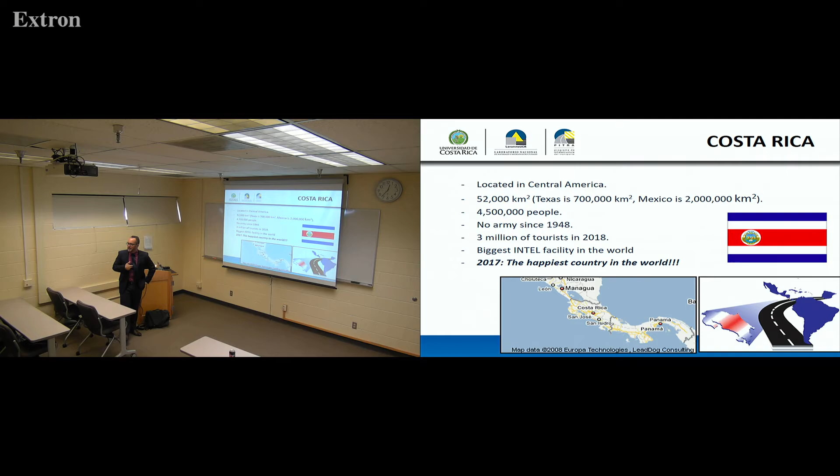And for the second time, in 2017, we are the happiest country in the world. This is very important.

The University of Costa Rica has 240 academic options, so bachelor's, licentiate, master's programs. We have 480 grad programs at the university. We have 257 international agreements.

Actually, we are working on one of them with Dr. Erol Tutumluer. There's a little bit more than that, but like 40,000 undergrad students and 3,000 grad students. And we are number 3 among universities between Mexico and Panama and the Caribbean area.

The first one is UNAM in Mexico City. The second one is the Technical Institute of Monterrey. And the third one is the University of Costa Rica.

In Latin America, we range between 16th and 21st, depending on the type of ranking. And we are among the best 500 universities in the world, depending on the ranking, but I think it's pretty good for the university.

My program, the program that I am leading, belongs to what we call LANAMME-UCR. LANAMME is the National Laboratory of Materials and Structural Models.

I have to say that one of the developers of the lab was a University of Illinois graduate, Dr. Guillermo Santana. Actually, right now he's in the Board of Regents of the university. He made his PhD in the 70s and 80s.

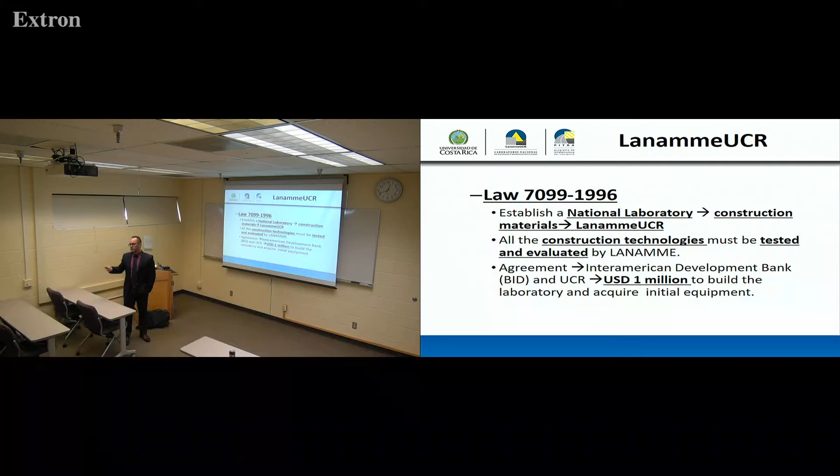But for a lot of years, we've been the most profitable investment of this bank, because with this seed of $1 million, we have done a lot more things, which I'm going to show you. In 1997, when I started as a research assistant, this is what we had: basically the Marshall hammer, a couple of viscometers, and one penetrometer. At the beginning, our lab was thought of more as a structural lab.

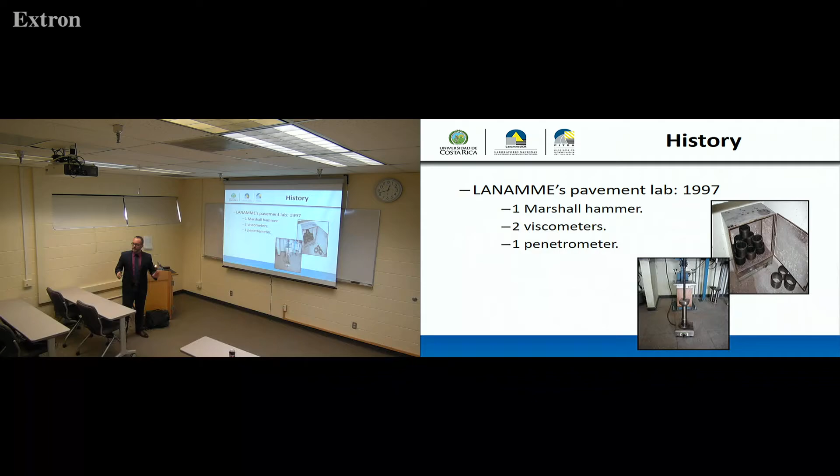But suddenly, the humble pavement guys start working, and we developed what I'm going to show you. But at the beginning, the idea was structure, not pavements.

So this is what we had in pavements, and we started working from that at that time. It happened in 1997. Our national road network was in pretty bad condition, so we started helping and receiving money from the government to improve the conditions. Right now, in the national road network, you don't see this type of distresses.

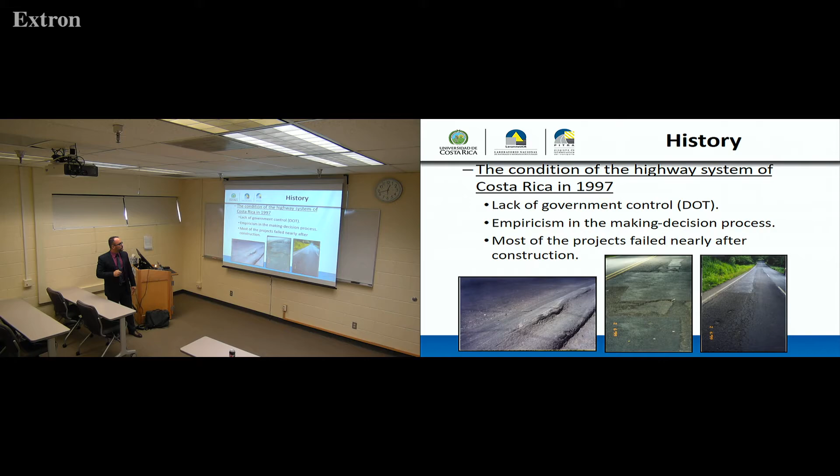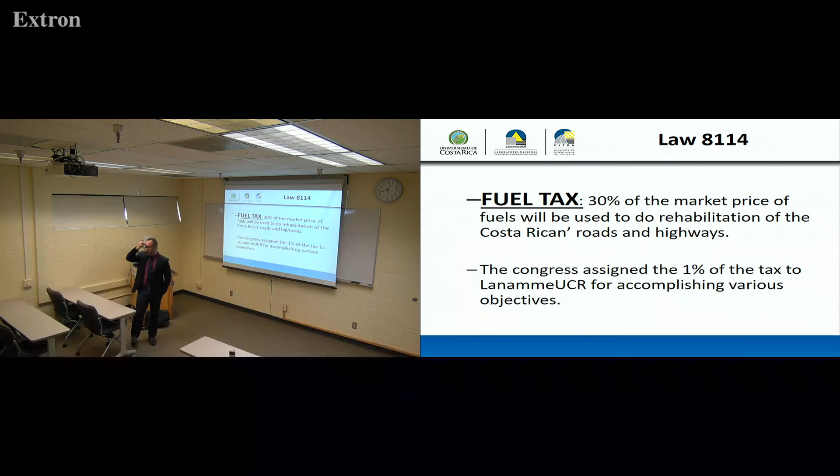In 2002, this new law, the 8114, started giving us money. So we receive 1% of the fuel tax. The fuel tax in Costa Rica is 30% of the fuel cost. It varies from year to year, but it's between 8 to 9 million dollars a year for doing various things that I'm going to show you.

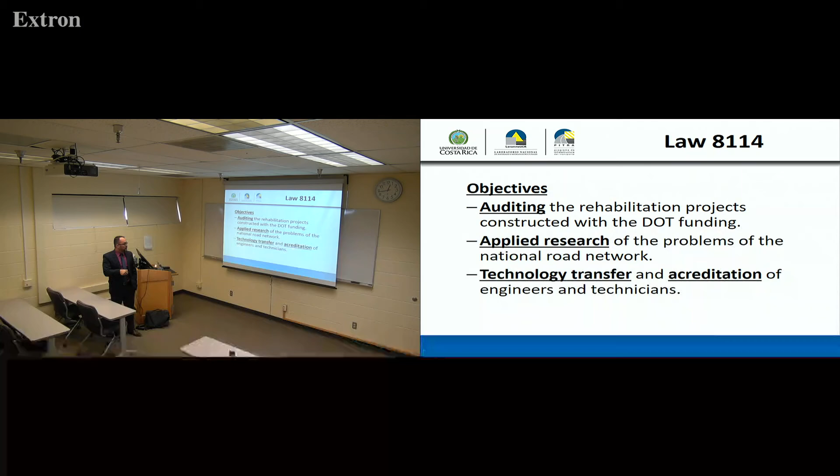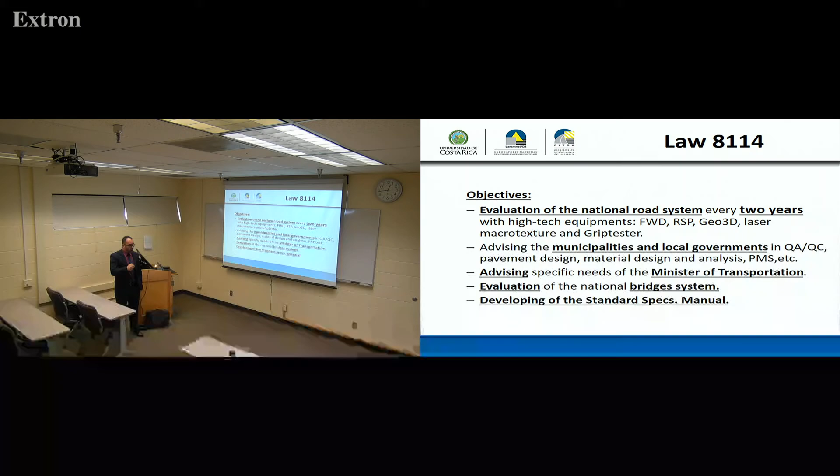Right now we have 6 PhDs working with us, 3 PhD students, and 20 masters from several universities around the world. Not only from Costa Rica - some of us started going to study abroad like 20 years ago, 10 years ago, and all those people have returned to the lab to work.

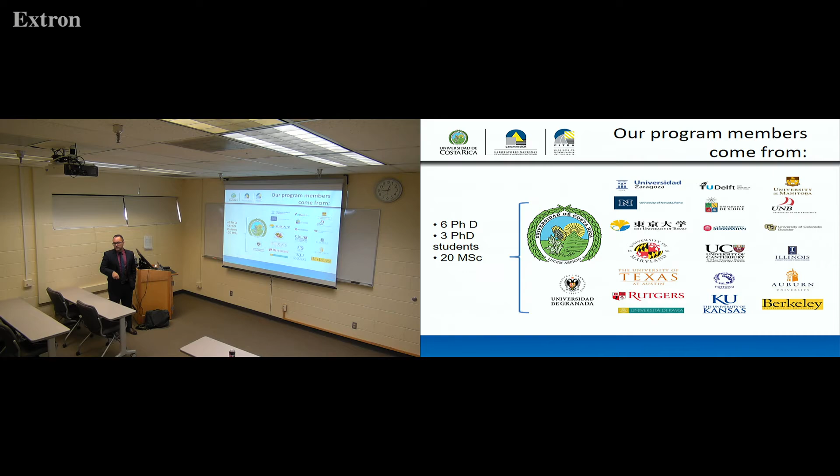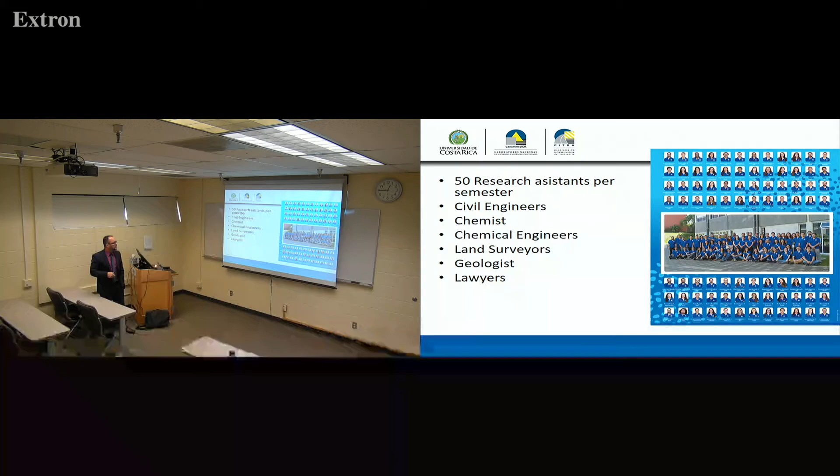Right now we have, as I mentioned, like 50 research assistants per semester. We take a picture every year. In the group, most of us are civil engineers, but we have chemists and chemical engineers that gave us all this knowledge to understand some things that we don't have the background for. We have land surveyors, we have also a PhD in geology, we have geographers, and unfortunately, we also have a couple of lawyers working with us.

I didn't put them up, but right now we have like 15 former students doing masters and PhDs all over the world - Europe, a couple in Brazil, and like 8 of them in the United States.

So we are working in-house, so in the lab, we can see the various phases of the materials, and it was planned like that. This is an actual picture of our AFM microscope, atomic force microscope we have. Actually, this image is the first image that we took of an asphalt at a size of 20 by 20 microns. So this is when we start trying to understand what's happening at this nanoscale.

We can do all the micro testing that you know, rheology and all this type of tests. We have all the performance normal tests, the performance for HMA or concrete or granular bases, all those things, and full scale testing. The idea is a little bit philosophical, but we are trying to relate everything.

We are seeing the properties at this scale. Right now we haven't linked everything, but we have the data - for example, of the asphalt here, and we have what happened to this same asphalt at the full scale test. So we are trying to link everything, what is happening, how the properties are changing, how the nanoscale properties relate to the full scale properties. We are doing some research about that.

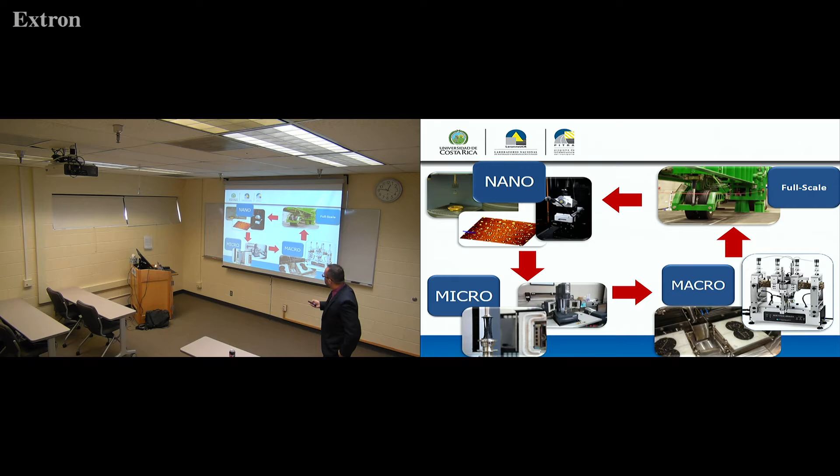For example, with Dr. Kim, not the old one, the young one, we are trying to develop some analysis here with FAM, and we are trying to see how we relate the FAM with the full scale test. We are doing several things, we are now playing with the data. We are working on all those things right now: nanoscale, moisture damage, HMA testing, PCC, recycling materials, a lot of recycled materials, stabilized materials, oxidation, full scale testing, LCA, pavement design, and software development.

This is an image of a crack in asphalt. You see here, this is 15 microns. And we developed this - this is covered by gold. There is a special process to cover the sample with gold during a night, and you can really see what is the size of the crack and what is happening around with the morphology of the sample.

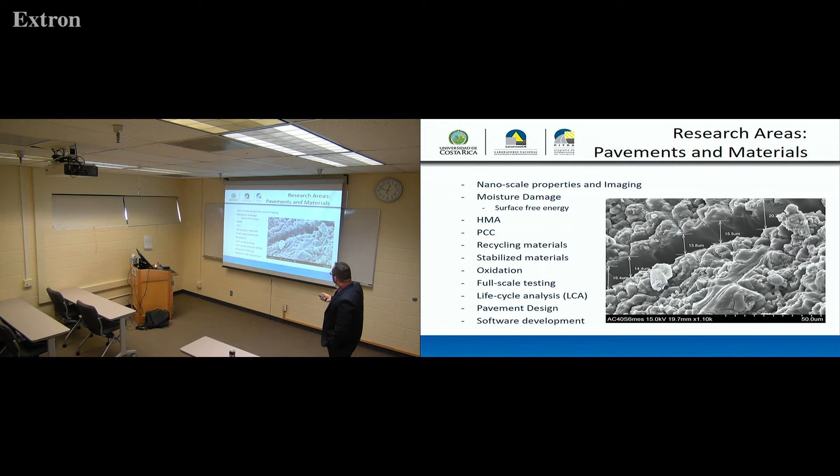I'm not an expert in that, but we have people that know, the chemists know a lot about that. This is the oxidation analysis and research we are doing, starting from the binder and all the crystalline phase, the peri phase, the sal phase, and how this morphology is changing after environmental aging.

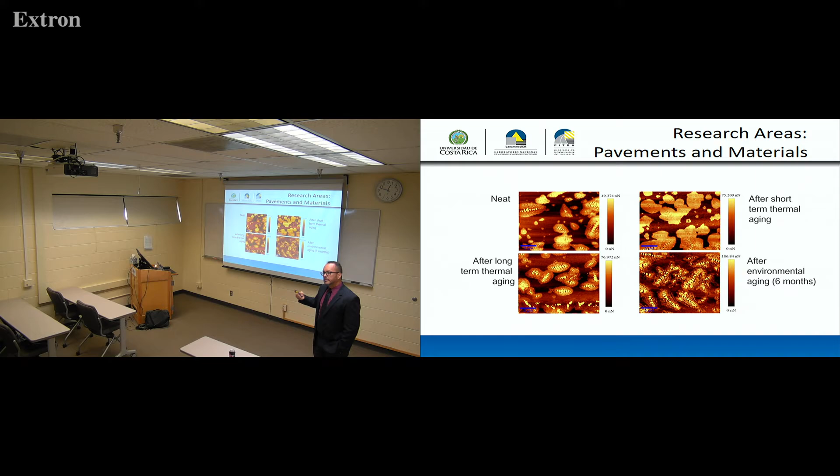This is, for example, 6 months of aging under environmental conditions, exposed to the air and to our rain. So we are doing some oxidation testing in a special machine we have, a little bit similar to the one you have here. And we also have a lot of samples on the roof of our building, aged with time, to see what is happening.

And we are also working with surface energy measurements. Let me talk right now about what we are supposed to talk about: accelerated pavement testing. This is the device that we have.

We have the Dynatest Mark 6 heavy vehicle simulator. We bought it in 2012, after 3 years of thinking about what to do, because we needed to sit down and think about what was the best machine to suit our needs, and also the type of experiments that we were going to do.

We received a lot of help from the South African guys, Louw du Plessis, Morris De Beer, Nick Kotsia, to shape the experiment. I think we've been very successful, and Dr. Al-Qadi knows that right now at the APT committee of the TRB, we are playing a good role for a new program, because we've only been doing this for 6 years.

But I have to say, we received a lot of help at the beginning from people that have done these tests for 40 years, just to know exactly what to do. Also Wynand Steyn, I know Wynand, they helped us a lot. They went to Costa Rica 3 times to teach us how to do this test.

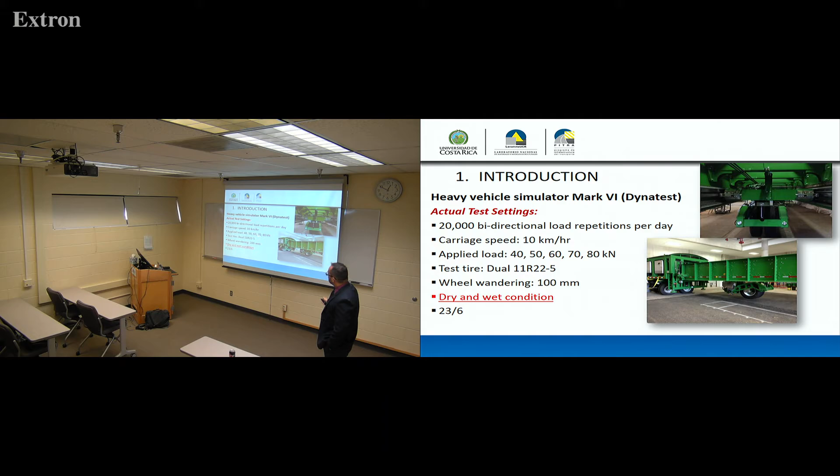We are passing 20,000 bidirectional load repetitions per day. We are working at 10 kilometers per hour. We are applying 5 different loads on each one of the test tracks. This is the type of tire. We are applying wheel wandering. We can apply dry and wet conditions, and basically we are working like 6 days a week.

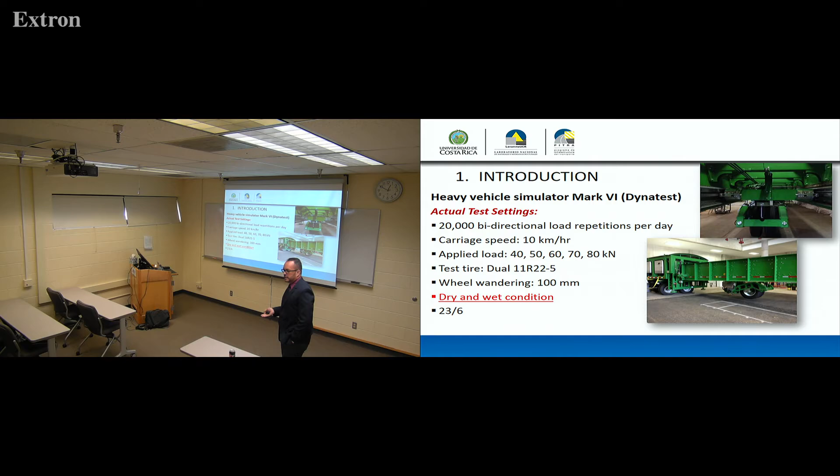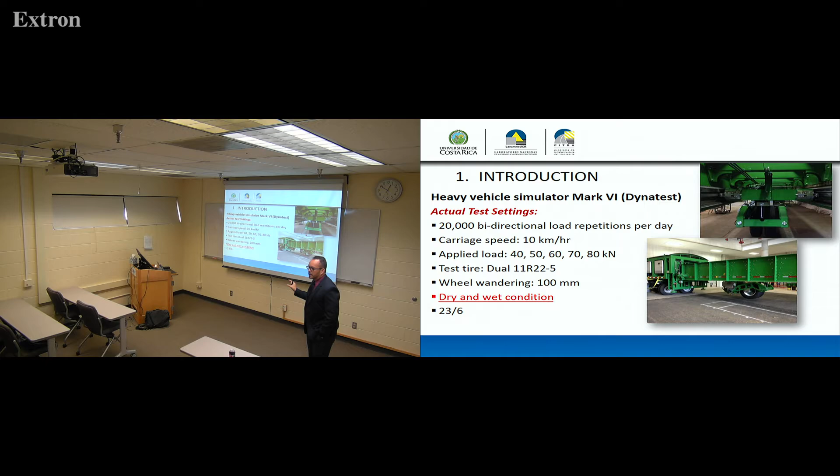We just stop the machine on Friday to do some preventive maintenance, once a month to do some stronger maintenance. Every 3 months we stop for like 3 days to do an overall maintenance. Basically the machine is working 24 hours a day. It's very important in order to have a cost-effective experiment.

We are working with moisture. Moisture is very important for us. This is the reason we developed a full facility in order to simulate the groundwater table and also rain. And this is the reason, you know. Let me show you that.

Where we have the least rain, it's 1,200 millimeters a year. But the average of the country is almost 5,000 millimeters a year. But we have places with 8,000 millimeters of rain a year. That is a lot, 8 meters of rain. So we need to simulate this pretty well.

When we were starting the dynamic testing on saturation levels for granular bases and soils, we started doing all the curves from dry to wet, but then we met with the geotechnical professors, and they told us, Luis, we always have 80% saturation for the whole year. This is mostly true even in the drier part of the country, where we have the soils and granular bases, basically the subgrade, fully saturated or very saturated.

So these are things we need to consider in our design, because basically what Latin America has done is copy others' design methods without calibration. And this is when we start having very bad pavement performance.

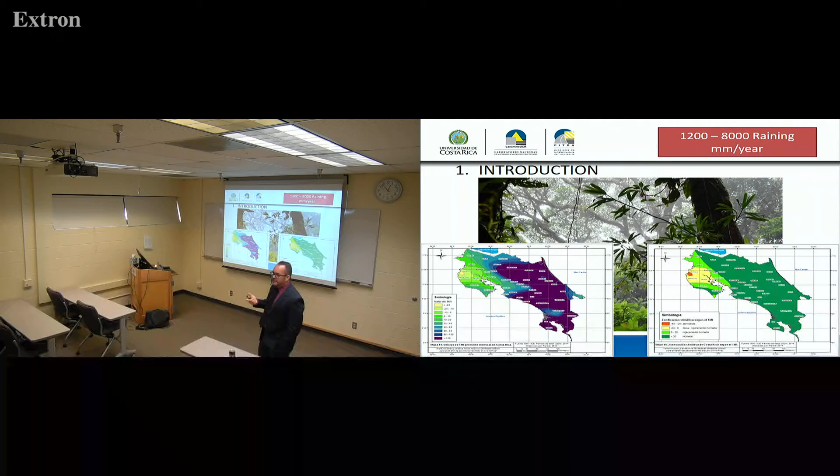So we have these rainforest conditions, but if you go to Peru or Bolivia, you also have the ultraviolet rays of the sun hitting in a very different way than other parts of the world. There is not a lot of research about that. You can see in Bolivia or Peru, a hot mix asphalt pavement failing very quickly, only because of this oxidation. So we need to develop research specialized for those conditions as well.

The numbers: we have passed with this experiment 9 million load repetitions, around 75 million ESALs, and 16 test sections. I'm going to show you that.

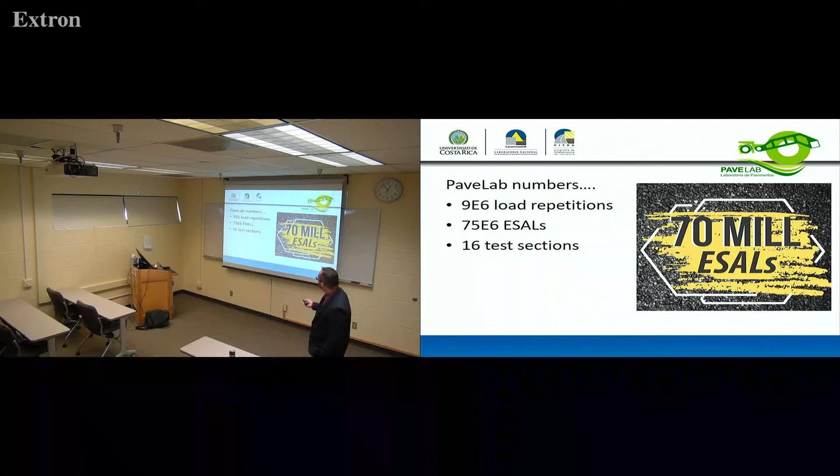We could put the best pavement here and have minimum repetitions and nothing happens, so it's not going to give us information. So we designed something typical for Costa Rica, but constructed so that we were going to be able to fail it under test, because we want data to see what is happening, how the moduli change.

We also evaluated construction practices, yes we did it. It was pretty funny - the last 2 sections, when we had the truck dumping the HMA, we had to use shovels to move it because it was basically cold. But it's pretty common in Costa Rica, so we were not afraid about that. And we calibrated our own CR-ME, the Costa Rican Mechanistic-Empirical Pavement Design Guide, that is almost ready. The calibration matters because the software is basically already developed.

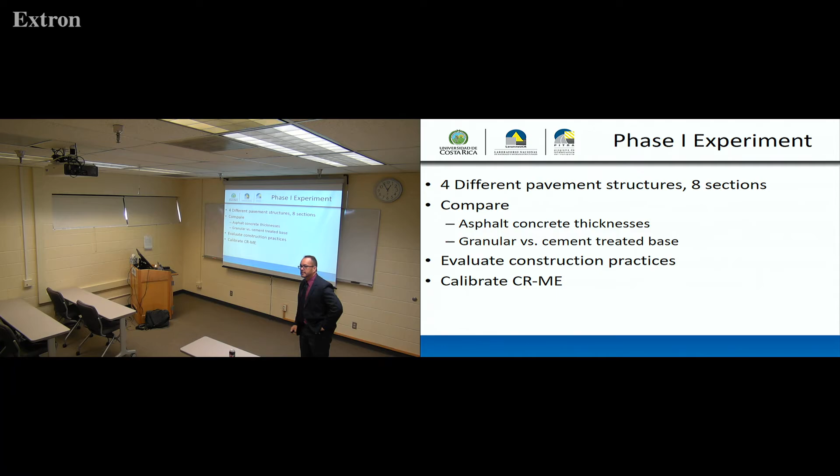This is the plan. We did this model 2 years before we received the machine. So basically, we planned and designed this test pit. This is like a swimming pool. We have filters here, and we put the subgrade.

The geotechnical guys didn't like this because we had to touch the subgrade, but we don't have another option. Because if we use the natural subgrade as it is, you have the groundwater table moving all the time, because in Costa Rica you have a lot of rain, so you have infiltration no matter what. So we need to have a very sealed test pit in order to avoid infiltration from the water outside.

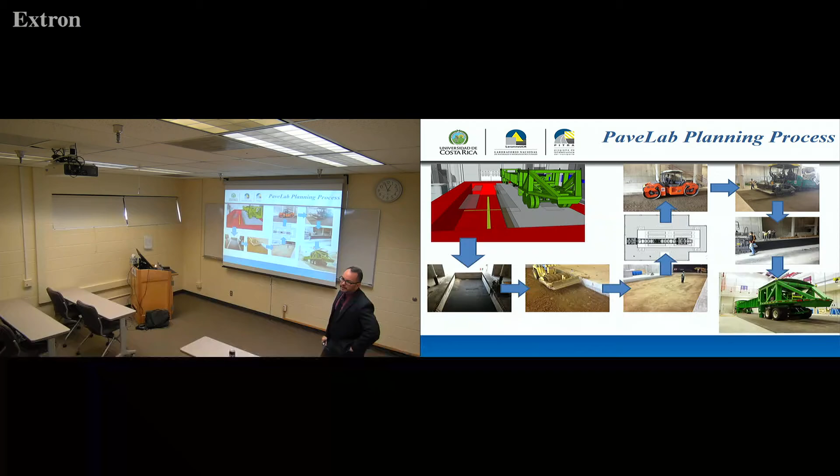And as well, these are the drawings. We have actual construction machines, the regular ones, so we were sure that this is exactly how the roads appear in the field. And finally, we had everything ready to perform the test. This part of the building, this is the new building that we built, was designed only for this experiment.

Click on the figure. This is the HVS working.

How long are your test sections? It depends, at least 3 months. One of them took at least 6 months. But we are learning - the idea is not having so much time.

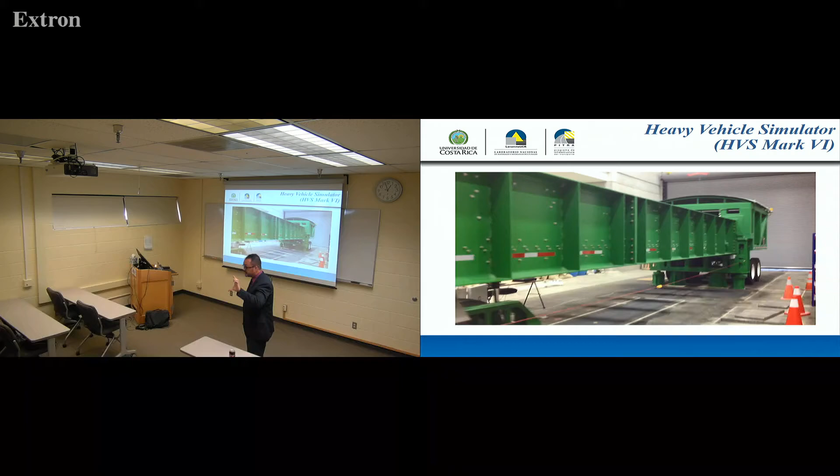But the cement-treated base with the 12 centimeters, basically nothing happened to it. You see the HMA - I'm going to show you something. The moduli of the HMA didn't change after 20 million ESALs.

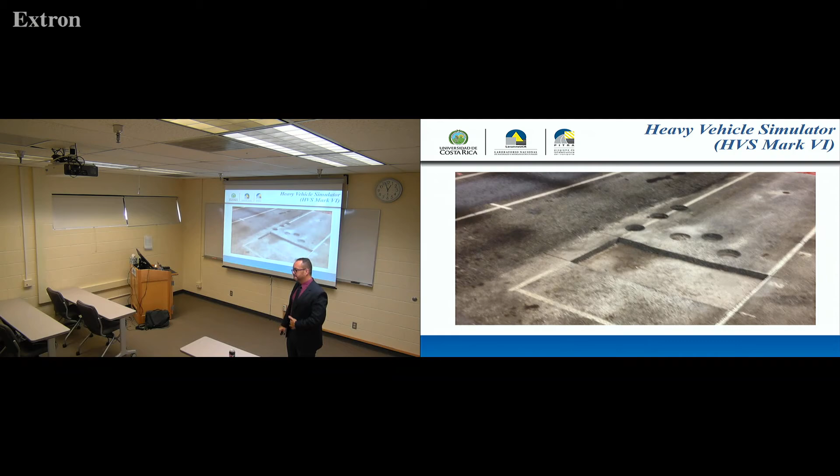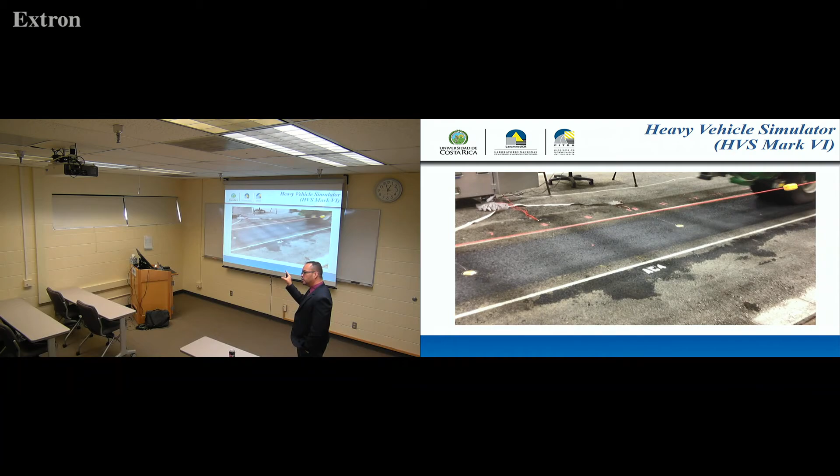Is that 8 meters long? The length - the full length is like 8 meters, but the real test length is 6 meters, plus 1.2 meters wide. This is the dead man cable - if something happens, you just go up, push it, and everything stops.

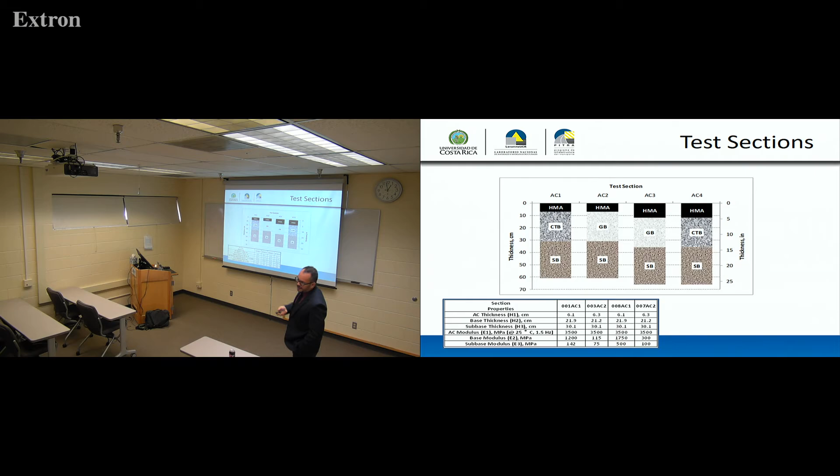Okay, well these are the sections. As I mentioned, the sub base is the same size, it's like 30 centimeters. We have cement-treated base and granular base, thin and thick - well, thick for our condition, because I know that in the United States thick HMA is thicker than that.

Okay, so those are the sections. We have 2 sections, we can perform two tests per pavement. Those 2 are 12 centimeters on top of cement treated - sorry, this one is 7 centimeters. This is cement treated base, this is granular base, and this is the saturation chamber, where we can change the groundwater level.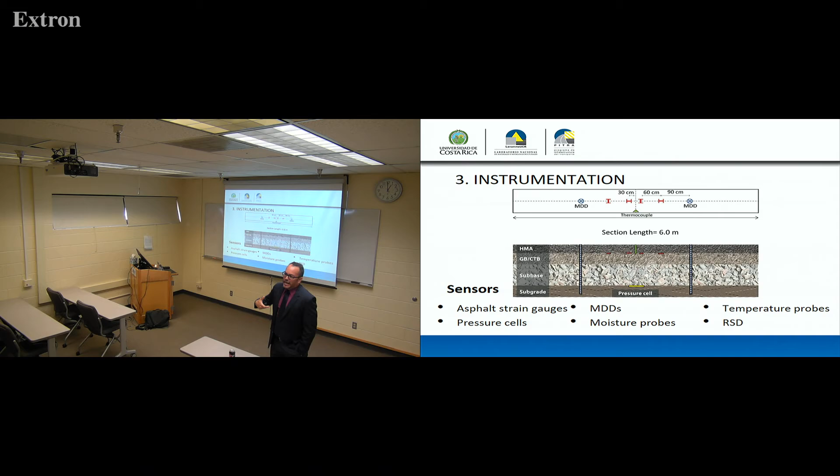the MDDs. We also every day perform the RSD measurement, the road surface deflectometer. So basically we can have 3 measurements for deflection: the falling weight at the beginning and at the end, every day the RSD, and every day also the MDDs. If you tell me, look, what have you done with this data? Not much yet. I'm going to show you some, but there are a lot of things that we haven't studied yet, because it's a lot of data, millions and millions of data.

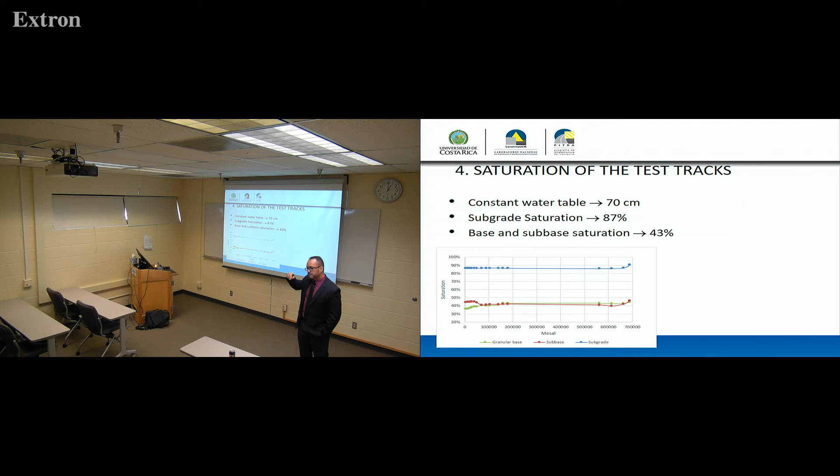Let me see, just to show you this, the saturation. In general, when we apply saturation, we have 70 centimeters of constant water table. The subgrade saturation is around 87%, which is normal, and for suction, the base and the subbase reach a constant value of 43%. You can see here how we monitor the saturation through the millions of ESALs applied in the test. So basically, it's pretty steady through this time. If we didn't design the test pit like that, we were going to have a lot of fluctuation on that.

Okay, so 5-year summary. We have performed the 8 sections that I already showed you, wet and dry conditions. 2 sections related to maintenance techniques, cold mix patching and surface treatments. We have performed 2 tests related to road safety, retroreflectivity of painting, I'll show you just some pictures, and performance of raised pavement markers. This experiment was paid by 3M and all those painting companies, and a test with interlocking blocks or pavers. Actually this last experiment was paid by a private company.

I was telling Jeff about that. It was a fun experiment. I say fun because, as I told Jeff, Costa Rica built in the Caribbean Sea an artificial island for a port, and they are using interlocking blocks. But the concessionary company is from the Netherlands. So the consultant company said, you have to use Netherlands sand. And it was very expensive; you have to ship it with ships and everything. So the guys that won the bid said, okay, we are going to try in this lab the Netherlands sand against 2 Costa Rican sands.

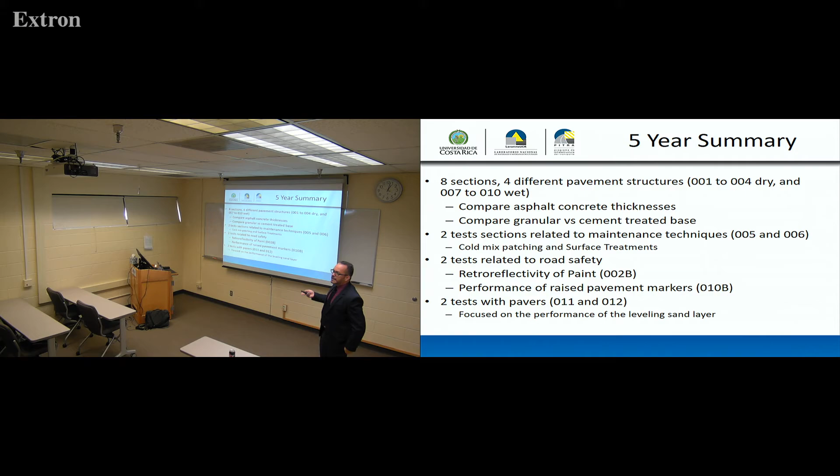So this is a quick summary. I'm not going to go in detail. As I mentioned before, we have almost 10.5 loading cycles, and regarding ESALs, almost 76 million ESALs in the various test sections and the various experiments that we have performed. We wanted to have it working almost every day. As the head of the program, I like to see the machine working almost every day, because otherwise it's not cost effective. We wanted to do a lot of work.

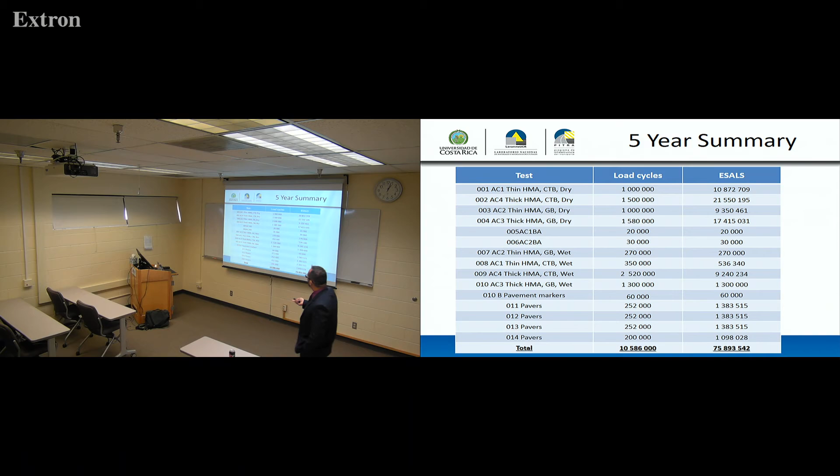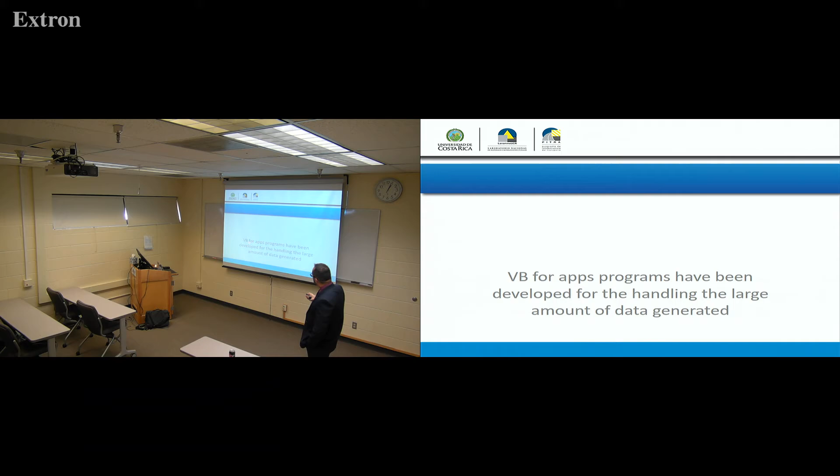We are doing a lot of Visual Basic programming to collect all this data, because it's a lot. All of you that have worked with ATLAS know that having good databases is very important for accelerated pavement testing. Otherwise, if somebody takes the data 10 years after and the database is not well designed, you are not going to dig out any good information. So you need to be very clear about that, and we are working a lot on that.

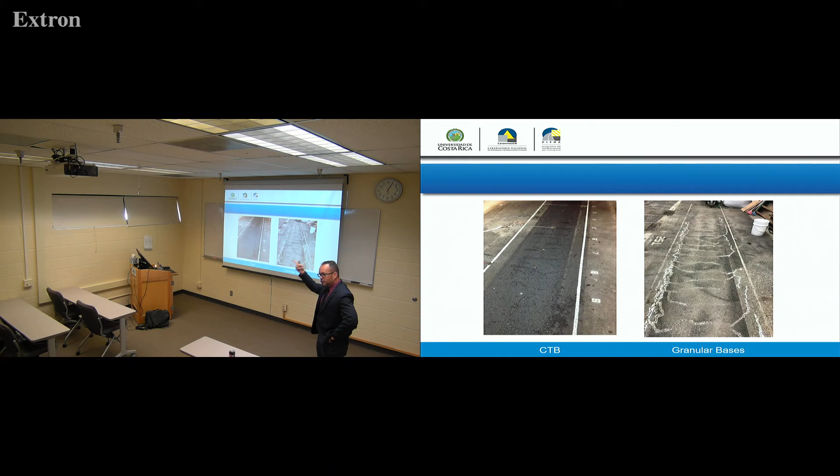But this is interesting. I have this picture here because I want to show you something later. For example, some data: the initial falling weight data. What happened to each one of the sections? This is the highest deflection. This corresponds to the weakest section, the 7 centimeter HMA on top of the granular base. And of course, this one is the stronger one, with 12 centimeters HMA on top of the cemented base.

And we can do several things. This is the initial back calculation of the moduli using the falling weight. The FAA, they have a machine a little bigger than ours, but they have a lot of money. So we can use the falling weight at the beginning of the experiment because we cannot put it below. But the FAA, their HVS can raise up every day, so they move it up and they put the falling weight below.

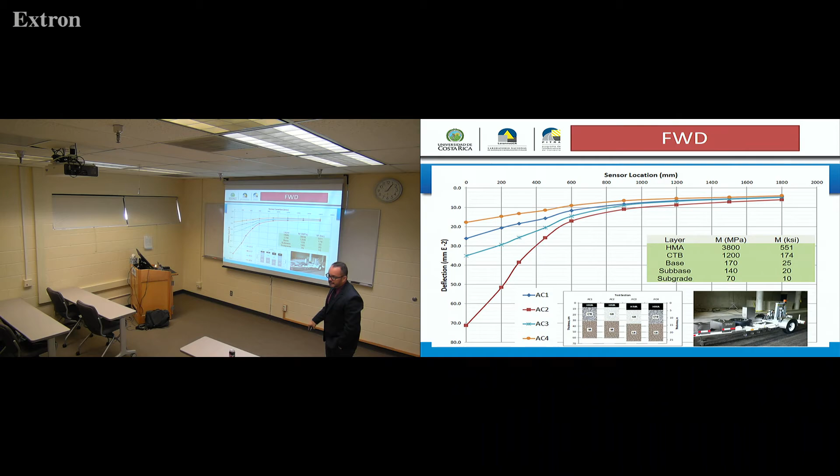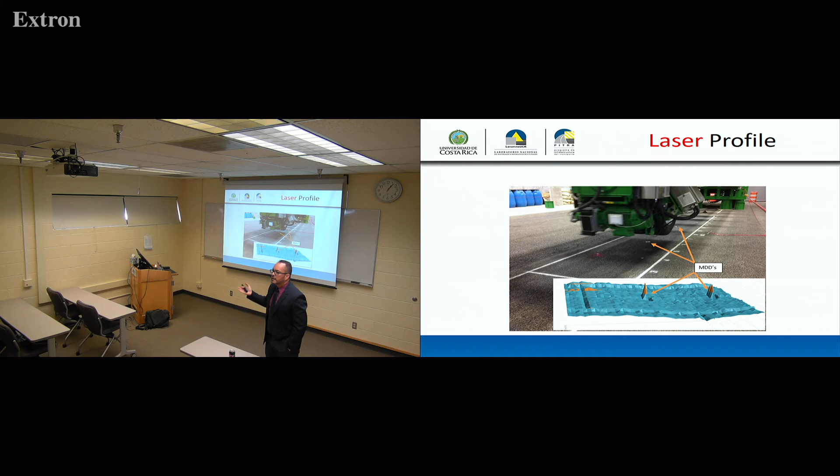It's pretty fun. This is the reason we have the RSD, the road surface deflectometer, to perform everyday deflection basin analysis and compare it to the MDDs, which in fact give us exactly the deflection at each layer. We have lasers here to measure the rutting and to measure the IRI. You can say this is not really IRI, because the section is pretty small, but we are calculating the IRI using the quarter-car model.

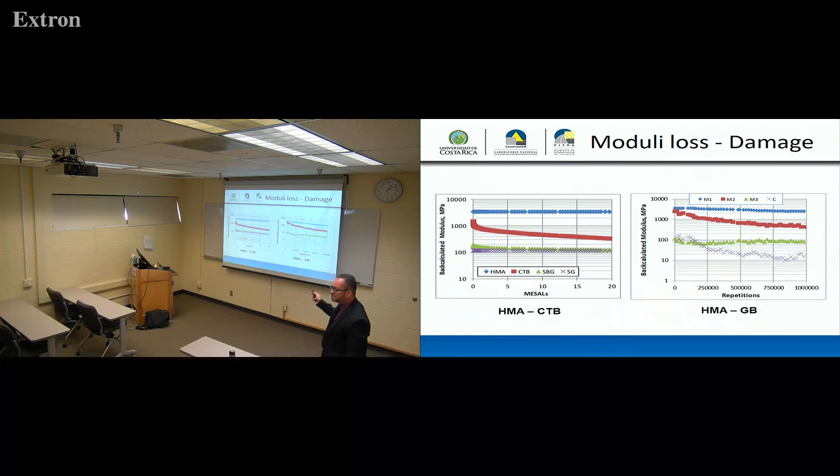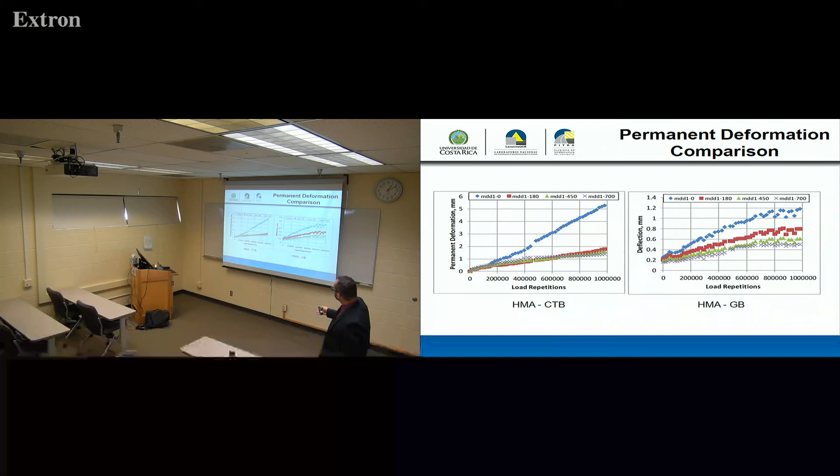And in this case, this is the HMA on granular base. Basically, all of them start having permanent deformation as well. In this case, this is the 12 centimeters HMA. Also, this is the 12 centimeters HMA. What happened regarding the permanent deformation? Again, this is the full set of experiments with the dry conditions and the wet conditions. I'm not going into details of each one.

For example, you can see here, this is the dry condition and CTB, the green one. Actually, this experiment we had to stop, because we had, I don't remember, like 2 millimeters of permanent deformation. So at close to 20 million ESALs, we stopped the experiment.

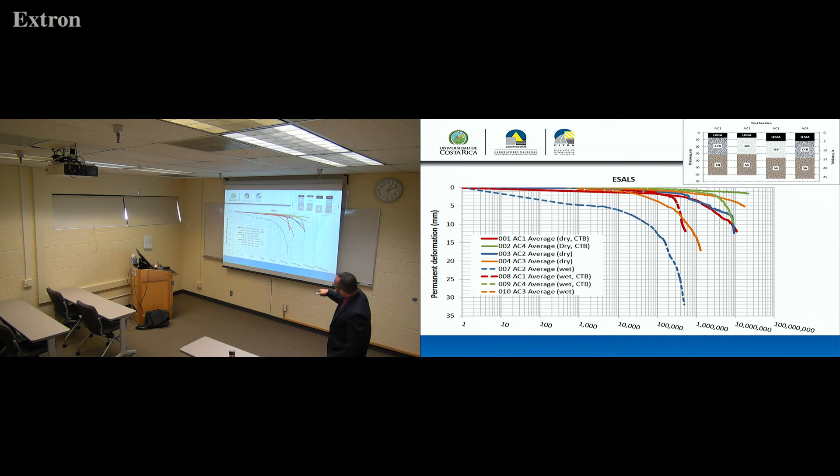Now let's see the other extreme, this one. This is the granular material with the 7 centimeter HMA under wet conditions. So we have a lot of data to see the performance of various sections. At the end, I'm going to show you how we're using this to calibrate our ME.

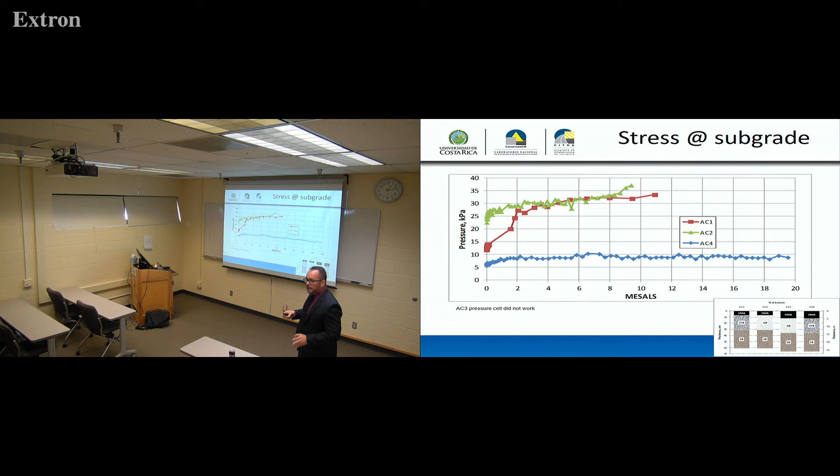Okay. Actually, I have to say something about cracking. In the granular base, you see a lot after some moment. But to see it, we need to paint with water a little bit, to see the cracks, because otherwise, with the cement treated base, you don't see anything. Now we are trying cameras, like infrared, to see if we see something for the cement treated bases.

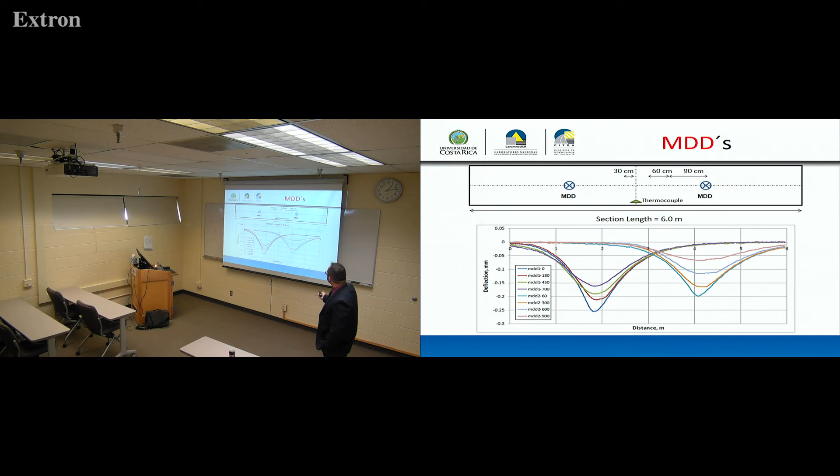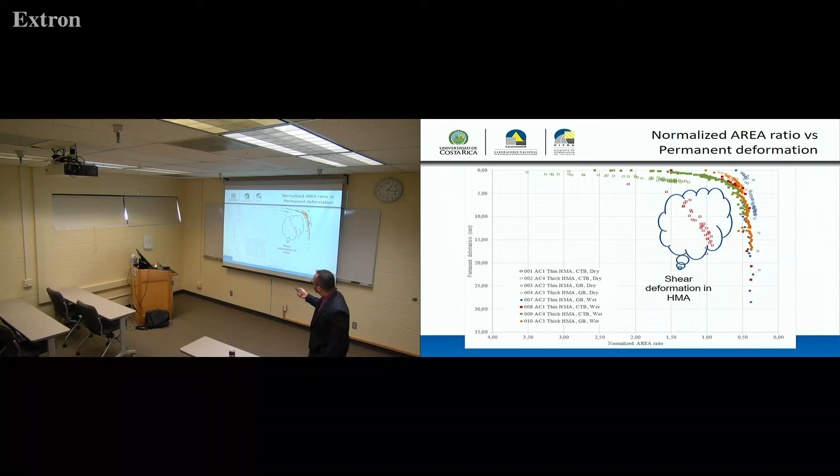And here we have the other various behaviors. For the normalized area ratio, if you are going into this direction, the performance is the worst. So we are trying—do you remember these parameters? I think they were developed in South Africa. We are trying to develop, to validate the specs that they have, or to do some specs for us. Here we have the other parameter, the radius of curvature, and you can see some trends, various trends.

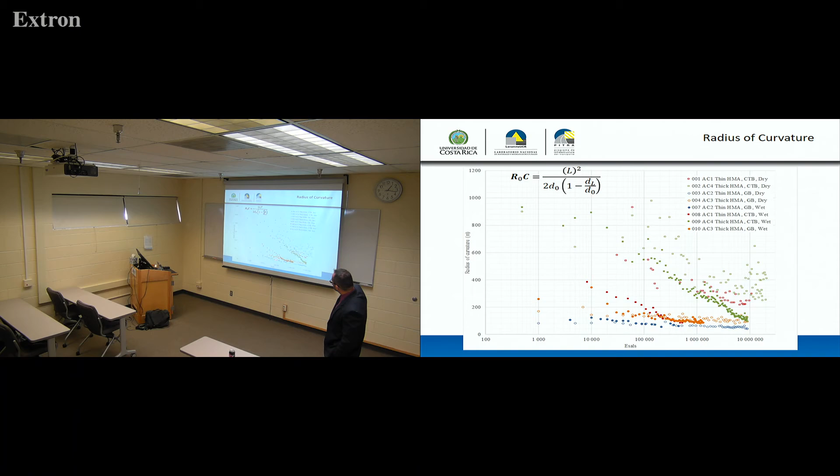For example, here the bigger is the best. At the beginning, I'll talk about this—this blue one is the thin HMA on top of the granular base under wet conditions, and how it decreased the modeling with time. And this is the same but under dry conditions. So we are analyzing all of them.

This one is pretty interesting. This is the normalized area ratio versus the normal parameter that we use with falling weight data. You can have here two different behaviors—this one here are the dry, and those are all the wet results. So we found like sort of a trend, and the data go together, you know.

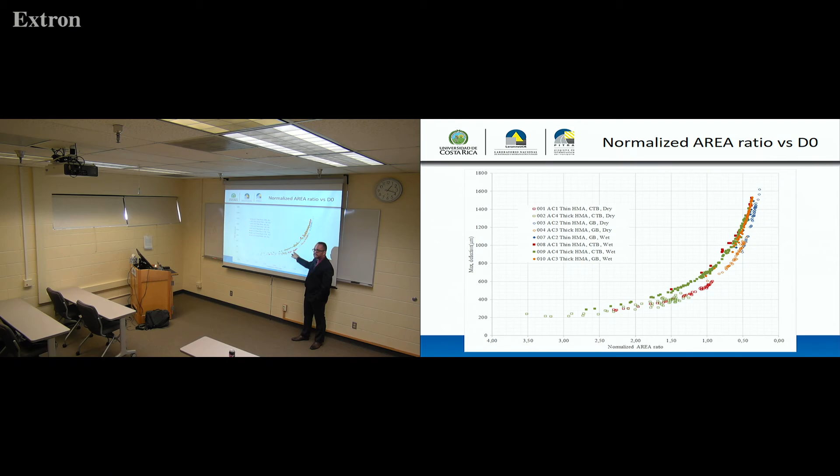As I mentioned, those are the wet conditions, those are the dry conditions, and what is funny is that everything is like continuing. We are not sure about that, but we think that we might extrapolate things about this behavior. If you ask me exactly what right now, we don't know yet—we are thinking. But at least it's interesting we have this difference. It was funny to find this difference among wet and dry, and how you have a section here, and the other is like in the same pattern. So it was interesting.

The IRI—those peaks are the wet conditions, the other behavior are the dry conditions. As I mentioned again, because some people have argued about this before, this is not exactly the IRI we mentioned, since the section is only 6 meters, but we use the same quarter car model to calculate it. So you can see, for example, this section—this is again the thin HMA on top of the granular base under wet conditions—it is behaving well, and there is a moment when it starts picking up.

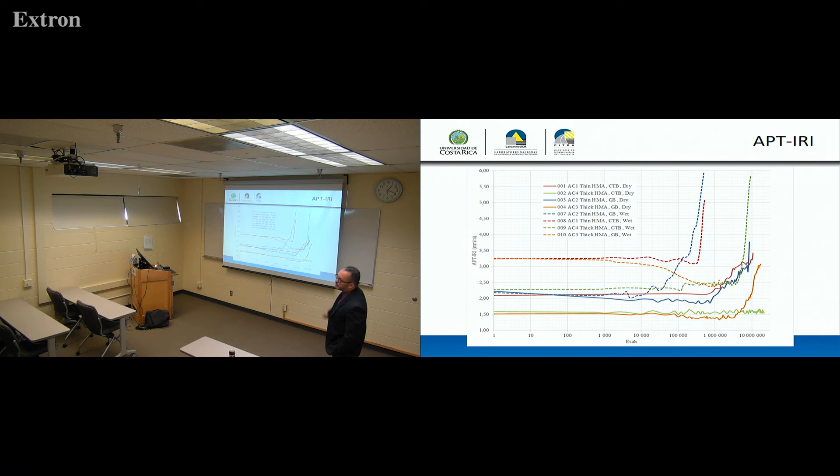Part of what we are doing with this data is to calibrate some performance models, going from the lab to the field or to the accelerated pavement testing. So, for example, we are calibrating this transfer function for the 4-point bending beam—all of you know that—for plant mix and for lab produced mix. We have several data to do that, and we are trying to correlate this with our actual test sections' fatigue mode.

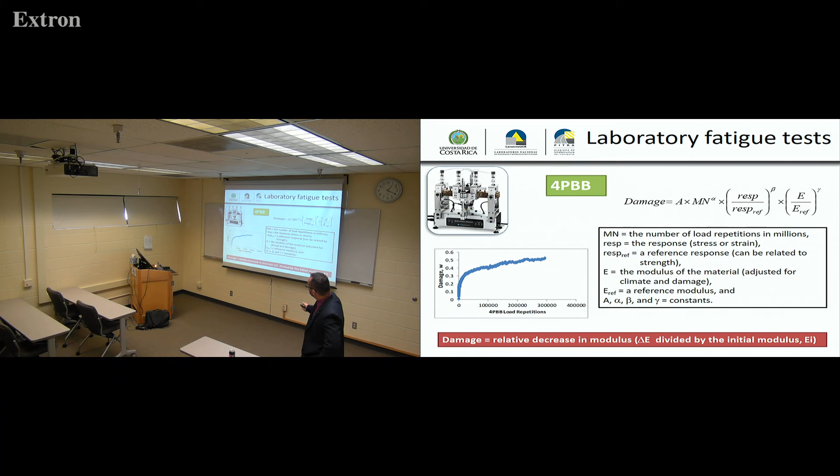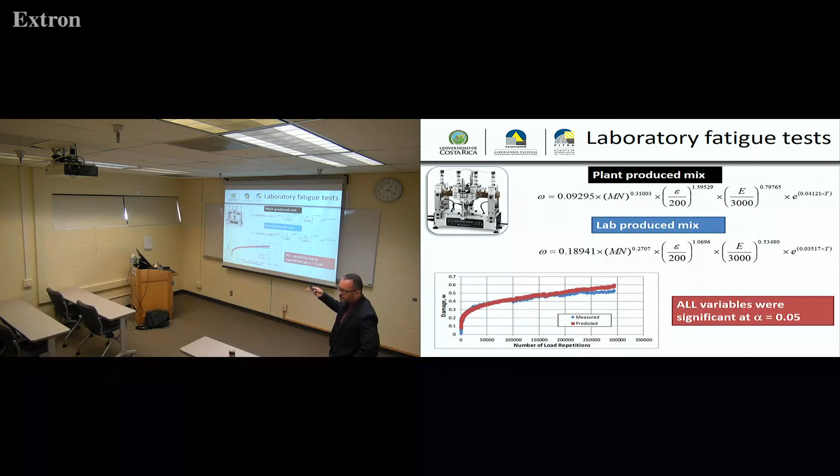We are using the concept of damage, basically how the response is reduced with time, using this damage idea regarding the load repetition in the 4-point bending beam, and trying to relate the same concept to what happened in the field measurements, since we have the moduli every day. So at the end, for both the plant produced mix and the lab produced mix, we have a model of damage. We'll do some statistics to see whether everything was significant or not. We use the data that I already showed you before.

We tried to—it was a very small work, not published—we tried to see if the moduli that we calculated was correct or not by trying to approach it using the 3D-Move software, the viscoelastic software that can predict the behavior of the material under certain speeds. We tried to correlate what we predict with the model against the actual measurements of the LVDTs.

We also use finite element models using this as a tire footprint that we develop in our lab as well. So at the end, we find some correction factors for the plant produced and for the lab produced mix. I'm going to show you one of the equations here.

At the end, for example, for lab produced mix, we found this general fatigue transfer function using this idea that I already showed you. At the beginning, we were a little bit scared that it was going to give crazy results, but we compared it against the MEPDG. It works fine—not the same value, not close, but fine. We also compared it to other fatigue models that we think are closer to our conditions, and it's not giving crazy results. It's giving good results.

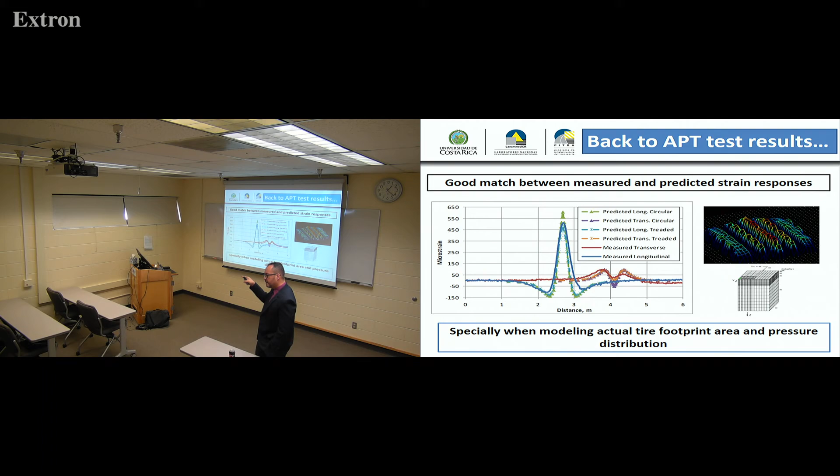As I mentioned, we use several things. This is the only use we have done with the strain measurements. We haven't done much yet with this, but at least we know the back calculation model is a good approach, because we calibrated the transverse and longitudinal strains and compared them against the back calculation model. We performed the analysis, and the results became pretty good.

So we are calibrating this. As I mentioned, the idea is to calibrate our own CR-ME.

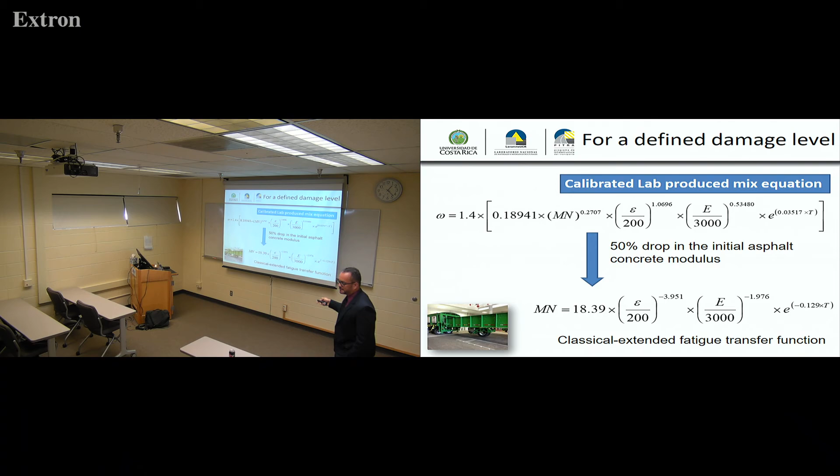We also calibrate some permanent deformation models for the base and the subgrade. Those are for dry conditions. We also have others for wet conditions. So we have the number of repetitions, the deviator stress, the confining stress, and this is the optimal percent of water of the sample.

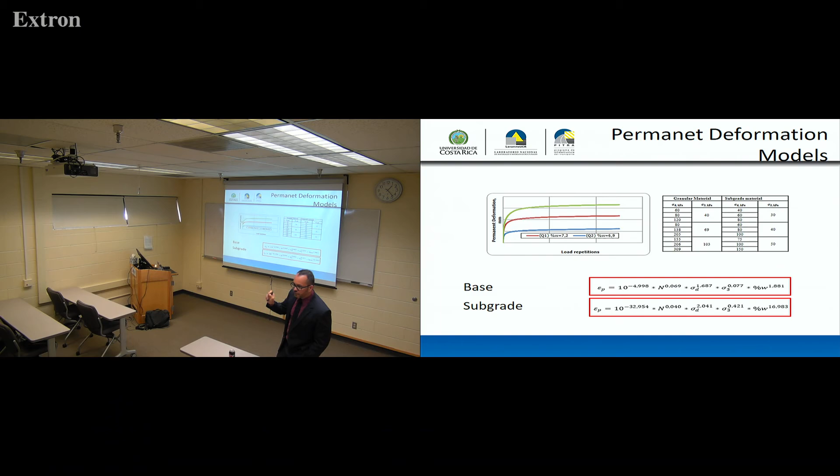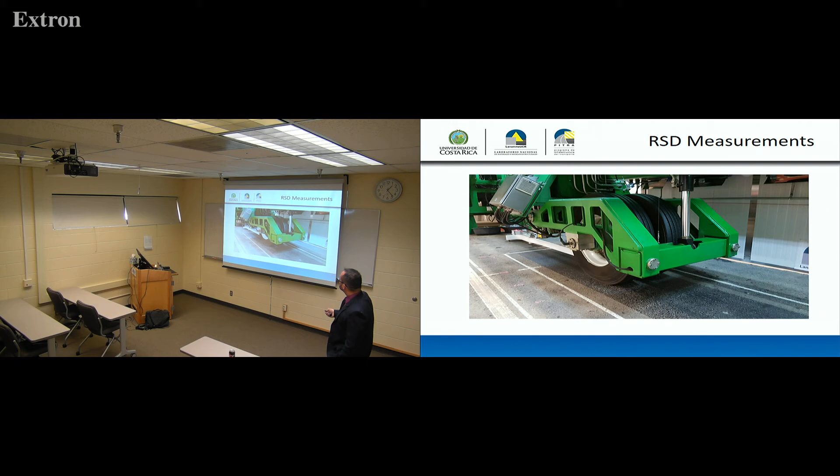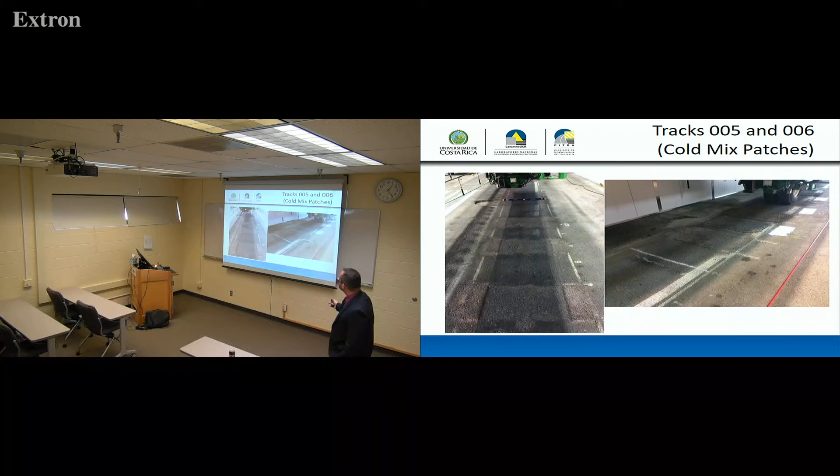Just to finish, some elements related to the development of the test. As I mentioned, the RSD measurements—those are the cold patches that we study. Also surface treatments; we are measuring some contact pressure studies. We already published a couple of papers using this modeling. It's just modeling, but we already know what is happening regarding contact stresses between the tire load and the surface of the pavement.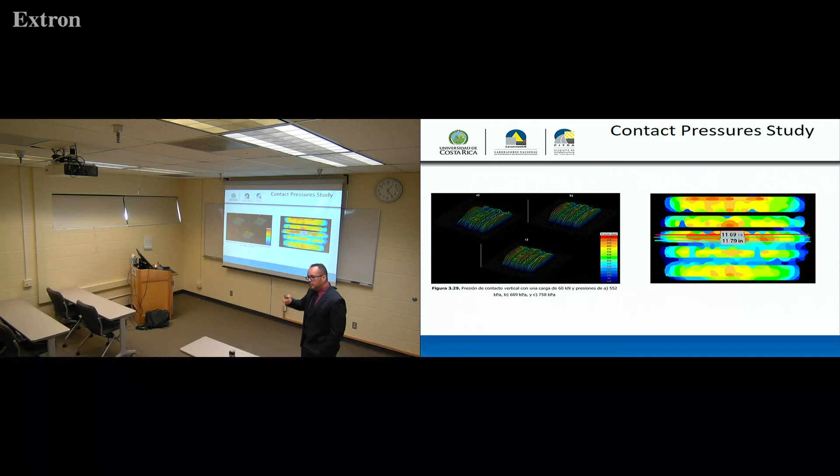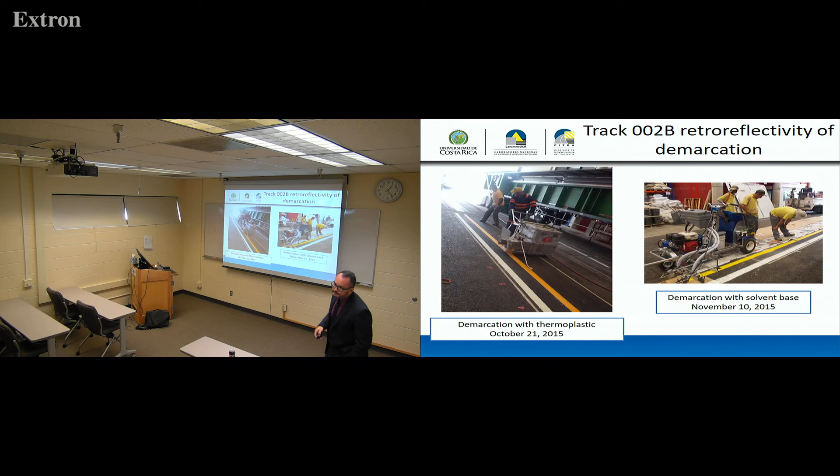Pavement marking retroreflectivity, as I mentioned, we work with thermoplastic and solvent-based paints. These are part of the results. Actually, at the beginning, to me it wasn't very meaningful, but for painting people it was a pretty good result.

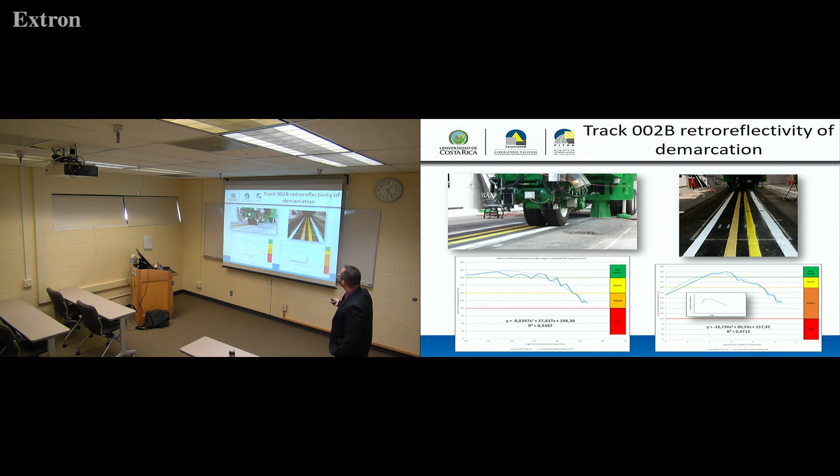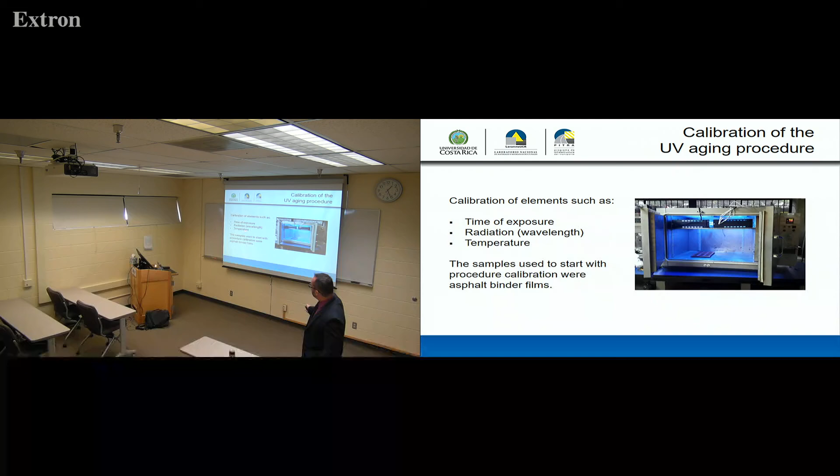We just started like one year ago on ultraviolet aging. As I mentioned, we have samples on a rooftop, but we also have this machine developed by a chemical engineering student who is working on that a little bit. So we are studying time of exposure, wavelength of the radiation, and temperature, and we are trying to relate this chamber to that chamber.

Interlocking blocks—this is the experiment I already mentioned, from the people in the Netherlands. But we are doing a second phase, to go a little bit deeper into the performance of the interlocking blocks and maybe suggest another design method for them. I know there are some design methods around, but we want to either validate one, calibrate another one, or develop our own. So right now a master's student is developing a finite element model of that.

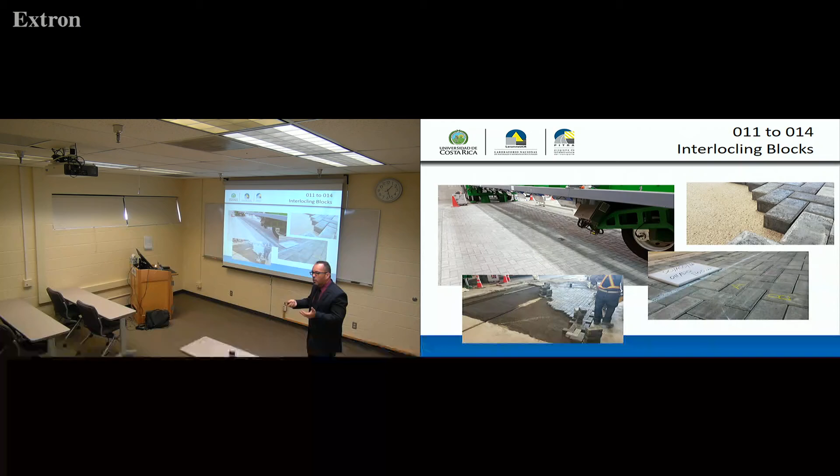Maybe in a second phase, with another student, we are going to study the experiment—how the movements of the small bricks are, the rotation, translation, the vertical deformation, what happened to the sand layer, and other things. Well, for the second phase, I'm not going to talk more than one minute about that.

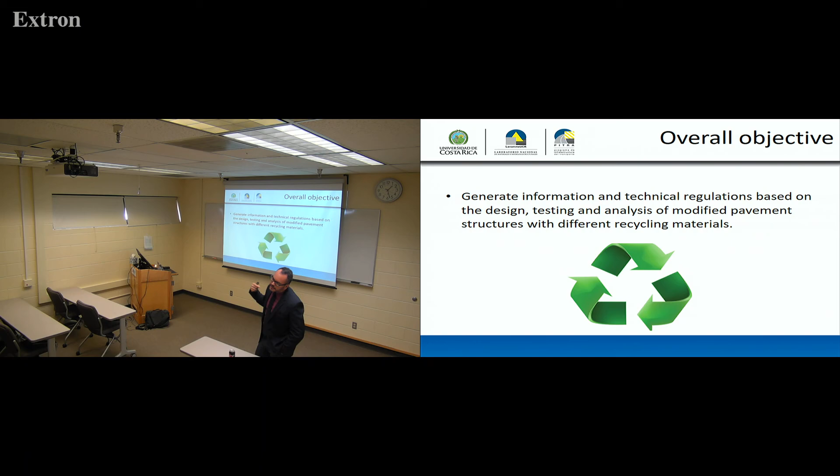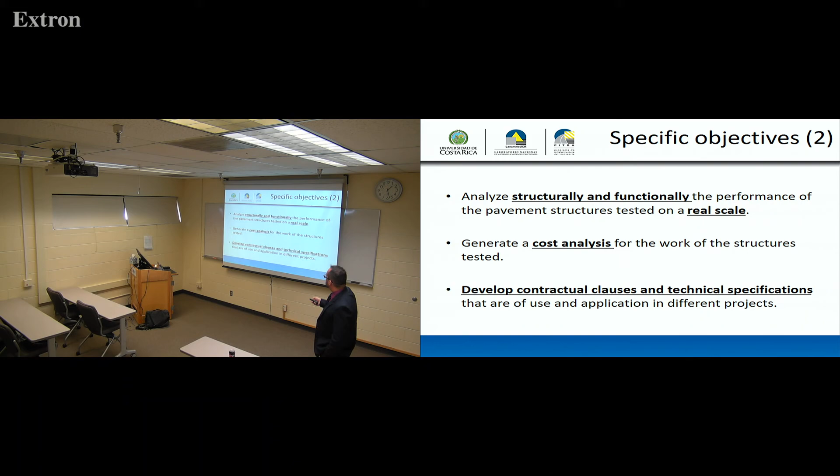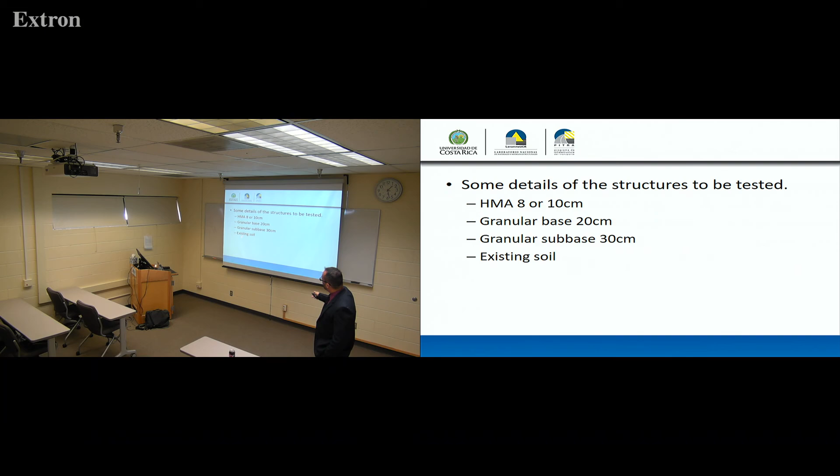We are working on recycled materials. We've done a lot of work on plastic added to the HMA, at 1 or 2%. Also with RAP—my PhD dissertation was on RAP, doing cost analysis, life cycle analysis, and preparing technical specifications. Basically, this is the test setup we are going to use: a 10 centimeter layer, a 20 centimeter granular base, a 30 centimeter subbase on top of the soil. And we are going to move the equipment to the field.

So basically, it's another software like all the software you know about. But right now it's becoming very popular in Latin America because it's very practical and very user-friendly.

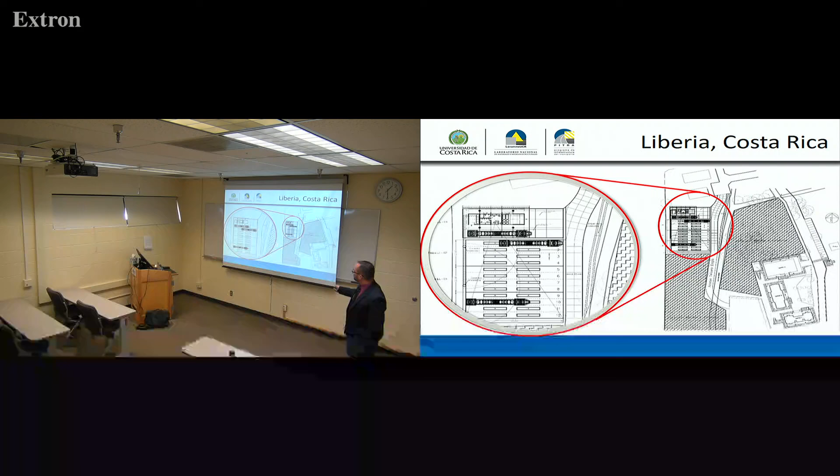The building is almost finished. This building is for the lab, so we are going to have more opportunities to do more research. So, that was it.

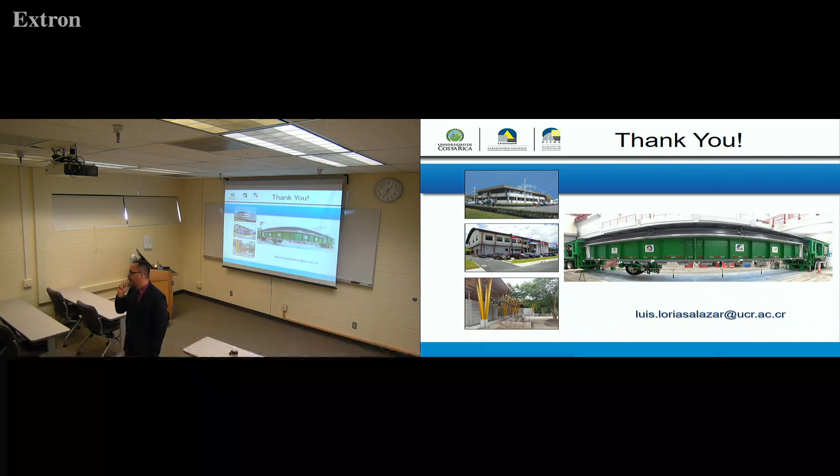Marshall asked: what was the cement content and compressive strength of your cementitious base? It's 2.5 megapascals... 25 kilograms, I don't know in megapascals, it's 25 kilograms per square centimeter.

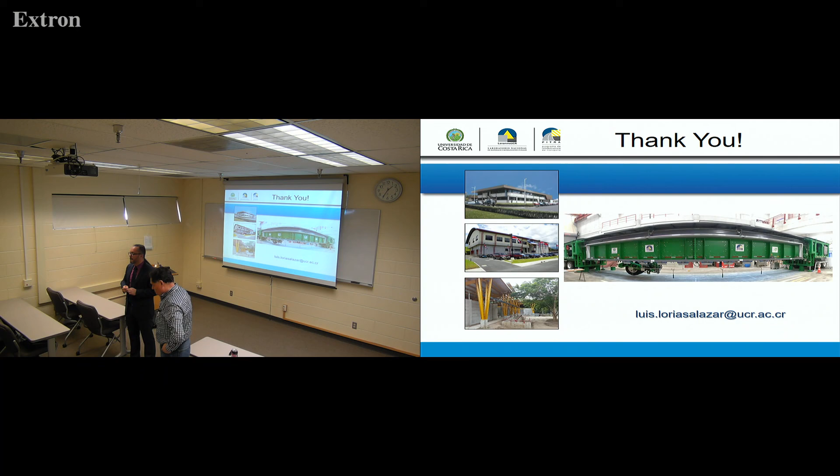Are you doing any work with the fatigue behavior of CTB? Not yet, we are doing it aside. We developed the test, we have it, we have an MTS and everything. We have a master's thesis that we already did, but we are not happy about the results, so we are not saying anything yet — we are going to repeat this experiment. That's a very key element, we're working on that issue right now. I have been for the past several years. And the fatigue behavior of CTB is not a settled issue, let's say.

Especially if it's cracked.

All the wet and dry comparisons you showed, I noticed you're always doing FWD and back calculation showing the modulus degradation. But are you able to run strength tests at different dry and wet conditions? This applies not only to granular materials or soils, but could apply even to the HMA and cementitious base. For the granular, yes. For the subgrade, yes. For the HMA, the normal ones, but not the strength.

No, actually we did it — we have a paper now, for example the TSR stuff. For the dynamic modulus, we have addressed it. We presented two papers at TRB. So we subjected it to various moisture damage cycles, not only one, and we have the dynamic modulus. We have also the TSR, and we have also the MAC. Not only one cycle — I think we went up to six cycles.

So in our experience, rutting really relates to strength more than modulus. And of course modulus is a good way to monitor things, but strength really governs.

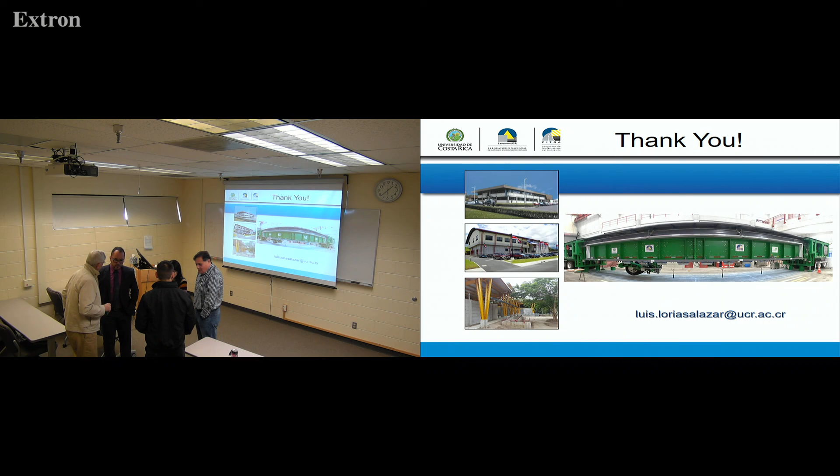There are a lot of things to ask. You're making it pretty well, yes. Things going well — you're submitting, you have some publications you're submitting. So what you're doing is... yeah, I can send you.